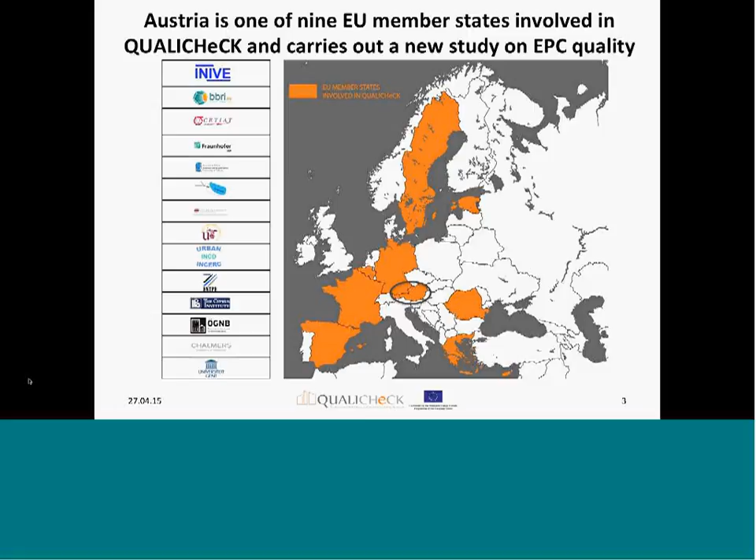Austria is one of the 9 member states involved in QUALICHECK doing a case study on a specific topic, and we work on the region of Salzburg. You see it here, so it is one of the 9 regions in charge of transposing and implementing the EPBD in Austria.

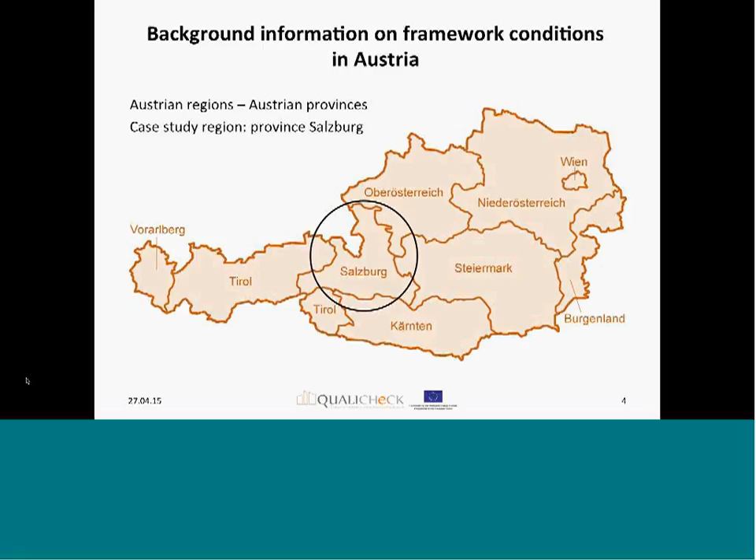How is the EPBD transposition and implementation organized in Austria? We have 9 regions. They are all represented in the OIB, the Austrian Institute of Construction Engineering. This institute develops a guideline. All the provinces are contributing.

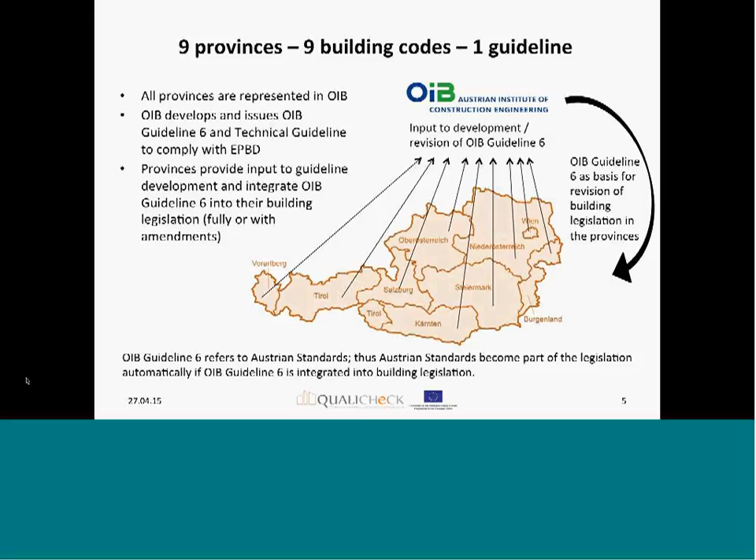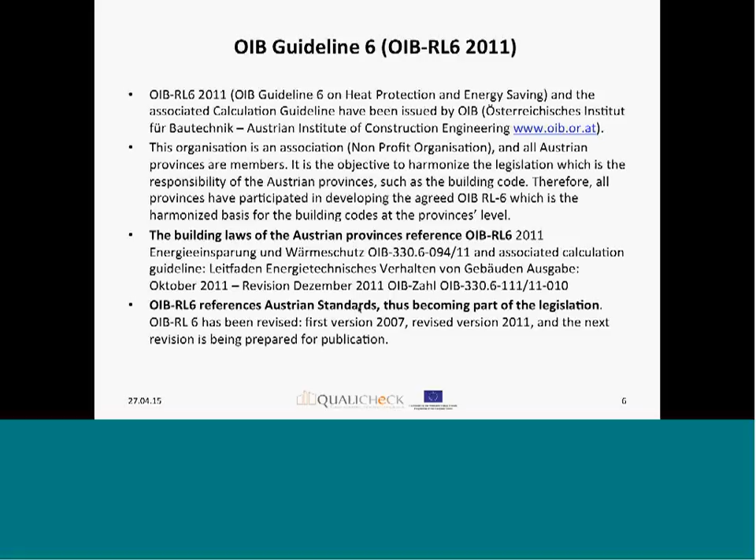This guideline is then the basis for the revision of the building legislation in the provinces. I will not go into detail now, but what is important for our subject in QUALICHECK is that the building laws of the Austrian provinces reference this guideline, and the guideline references Austrian standards, thus becoming part of the legislation. What you see here is a list of relevant standards.

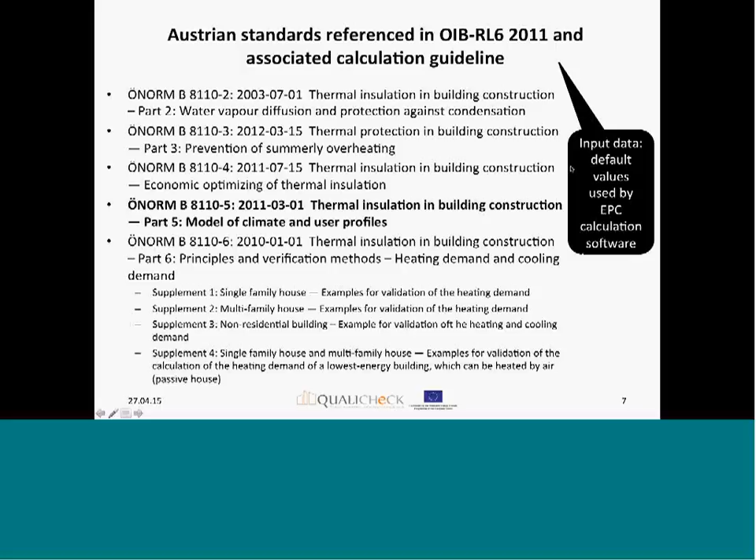I will also not go into detail here. Just what is important for our topic is that these standards contain default values, which we use as input data in EPC calculation software. They also contain information about procedures, so this is why this is important for our work here.

This slide shows the background of the Austrian case study. In fact, we have legal requirements, and this legal requirement is to produce an EPC and show that the energy performance minimum requirement is met. There are several measures how to check compliance.

Like automatic checks in calculation programs and during upload in the EPC database. There is enforcement, like tied to building permits and financial incentives. And then we have a big area of quality assurance methods at different levels.

These quality assurance methods can take place during the design phase and the completion phase. Usually in Austria we have only one type of EPC, the so-called design EPC, which is issued at a very early stage of design and necessary to achieve the building permit.

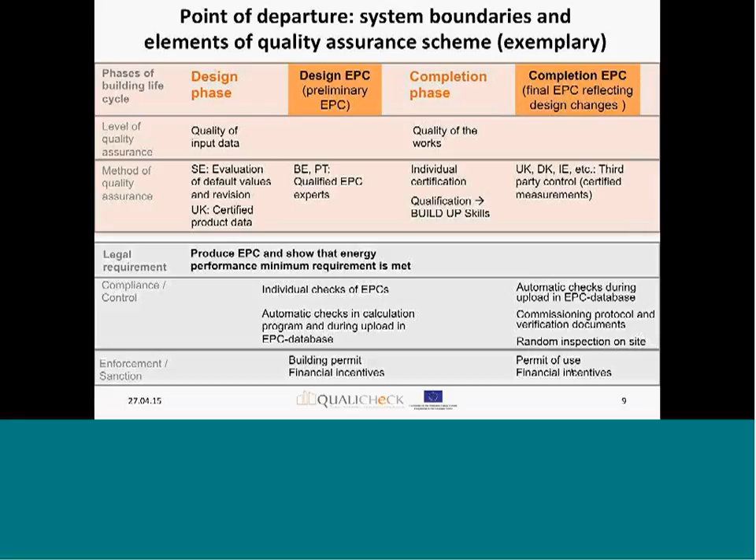In the region of Salzburg, there is also a second type of EPC issued after completion, necessary to achieve a specific type of financial incentive. In our case study, we analyze the quality of the preliminary EPC and the final EPC in the region of Salzburg to see...

...what are reasons at the very early stage during building design and EPC calculation for deviations due to a range of interpretation concerning input data. Do we have a deviation from plan, for instance, because different products have been chosen than actually planned?

And then, of course, there is another important aspect for quality of EPCs and also for the building as such, which means how is it with the quality of the works? Are there mistakes during construction?

So in fact, the expectation is that the final EPC was updated concerning changes in building design, and also reflects the quality of the works.

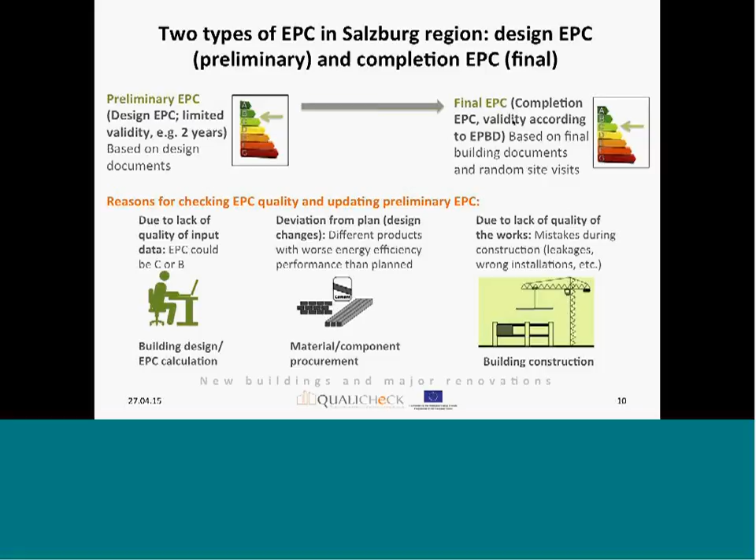So what are the objectives and the scope of the Austrian QUALICHECK study? The objective is to analyze the range of deviation of EPC energy performance indicators depending on the quality of input data and the type of EPC.

So whether we see the design EPC or the final EPC. Then it is the objective to analyze the cause of deviation and develop recommendations how to improve, and especially to develop recommendations for the administration in Salzburg, how this can be linked with compliance and enforcement.

What is our scope? We analyze 26 multi-unit new residential buildings in rural and urban areas. They are well documented, and the surface area is approximately 30,000 square meters.

In our analysis, we focus on 4 scientific areas: transmission characteristics, ventilation and air tightness, sustainable summer comfort technologies, and renewables in multi-energy systems.

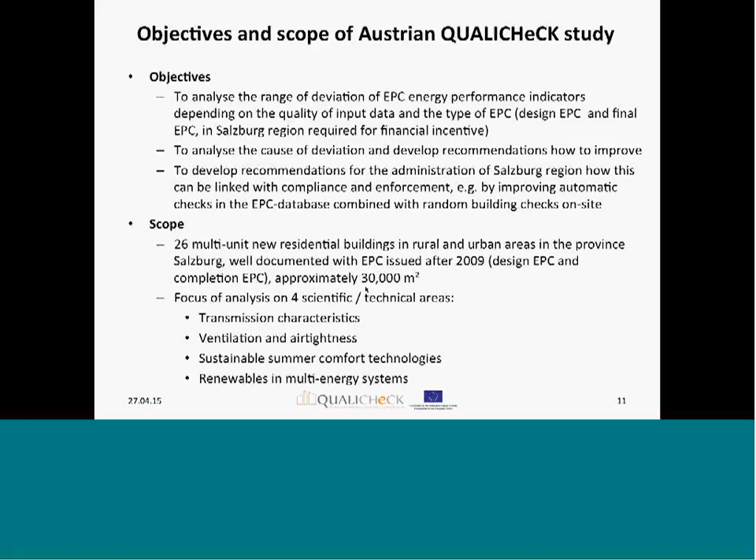How do we proceed? We put a lot of effort in data collection. We collected the design EPC, the completion EPC, but in addition, specific building information like site foreman's plans.

We did a comparison of the design EPC with the original completion EPC, and we did a complete recalculation of the completion EPC based on the collected building information. The analysis is then continued in site visits of selected buildings, inspection and check of crucial parameters.

All this information is used to also do a detailed investigation of specific questions, for instance solar thermal systems and expert interviews. The study ends with developing recommendations for the administration of Salzburg region on how to improve the quality and achieve better compliance.

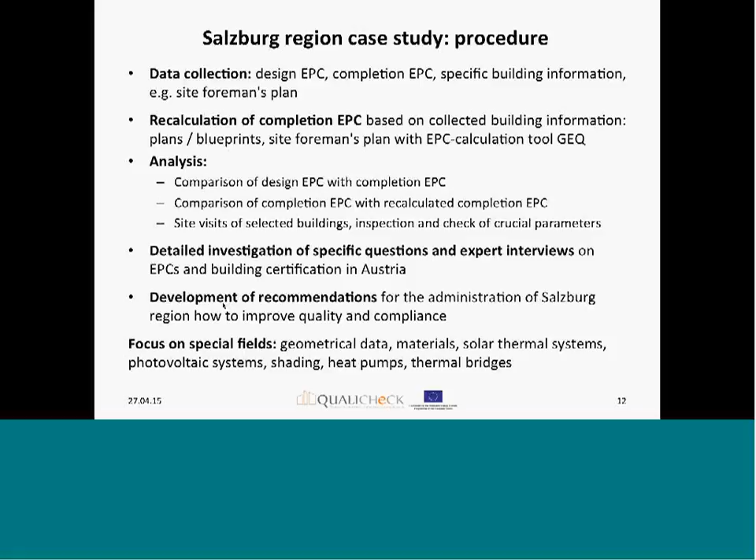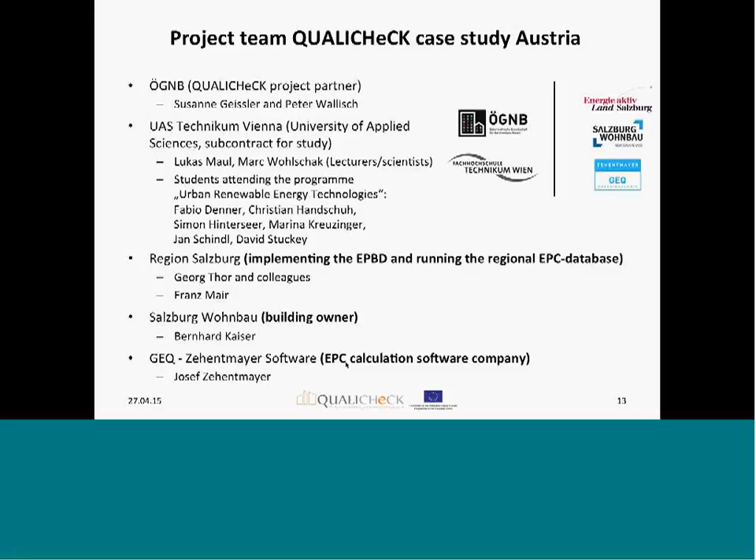In this regard, the composition of the project team is important. We cooperate with the administration, with the region of Salzburg, with the public body in charge of implementing the EPBD and running the regional EPC database. We also cooperate with the building owners and with the EPC calculation software company, because the findings regarding input data and default values will be very important for them.

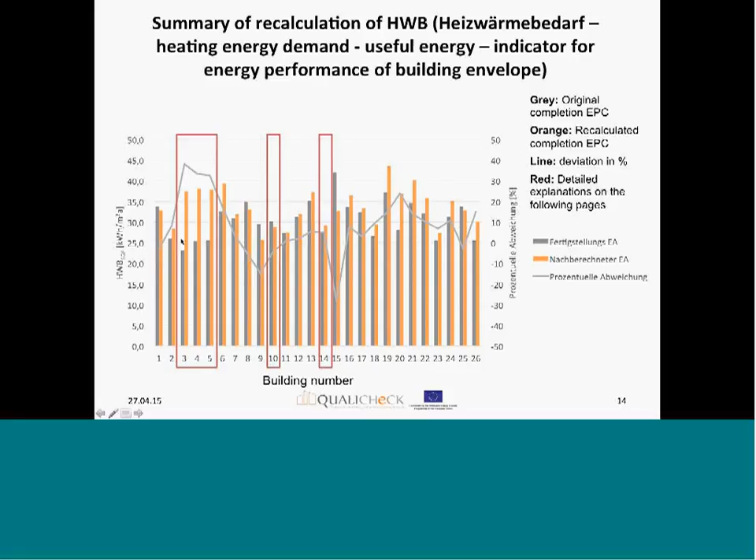The orange column is the recalculated completion EPC. The line here is the deviation, and the red mark shows the buildings I will go into a little bit more detail on.

So we have quite some deviation here, and the most important reasons are that part of the conditioned areas were not taken into account in the original calculation, and that the original calculation only considered one type of wall construction instead of different types, which of course has an impact on the U values.

These are quite typical mistakes. The next building,

it's building 10. There isn't so much difference between the original indicator and the recalculated one, but in this case mistakes balance each other out, meaning there are quite some deviations, but in the end the result doesn't deviate so much. Again, part of the conditioned area was not considered, and an indoor wall was defined as an outdoor wall in the original EPC.

Then we have another example here where the recalculated indicator is just a little bit worse than the original, due to differences in the window area and no zoning between the residential part and the commercial part.

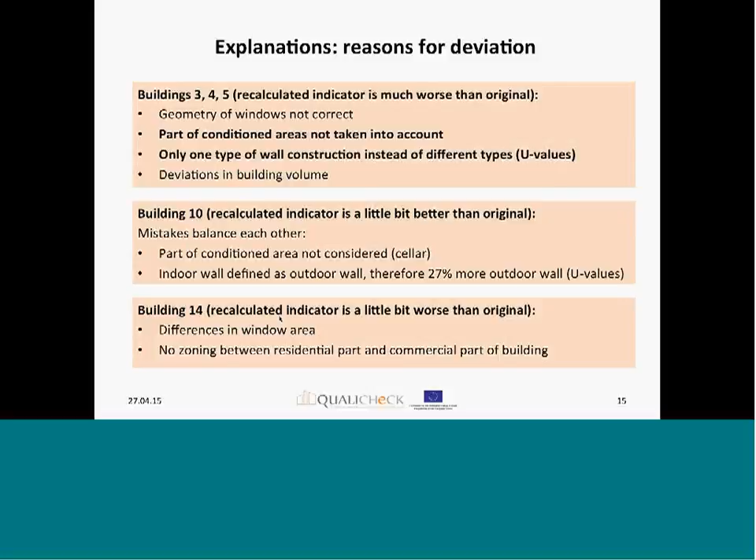So these were some exemplary findings from the recalculation of EPCs. To show you an example of how we go about the detailed analysis of specific subjects, in our case it's thermal bridges, shading, and solar thermal systems.

Regarding thermal bridges, we do different calculations. We calculate with default values according to standard, we calculate with detailed reference values, and we do a simulation to see how the input data impacts the calculation result. In fact, detailed calculations result in better indicators.

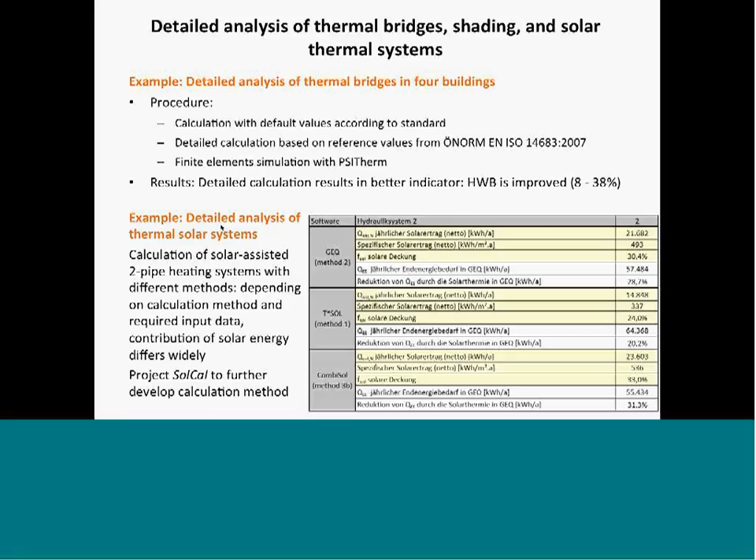Our indicator, heating energy demand, is improved quite substantially. We do a similar analysis regarding thermal solar systems, also calculating with different calculation programs and different types of input data to analyze the difference and the reasons for the difference.

So what are the preliminary results? Just to summarize, we have some findings regarding input data, and in fact mistakes or deviations are due to definitions which need to be improved to be unambiguous, so the range of interpretation has to be reduced. This is one of the problems we have in practice.

We need a revision of default data, and we need a solution for how to deal with heating systems, because it's difficult to deal with them at the moment.

The analysis regarding EPC update shows that there are quite many design changes, and therefore the design EPC must be updated to get a final EPC including design changes. However, it must be ensured that the EPC is actually updated based on the final design documents. Our analysis showed that the original completion EPC often does not differ so much from the design EPC.

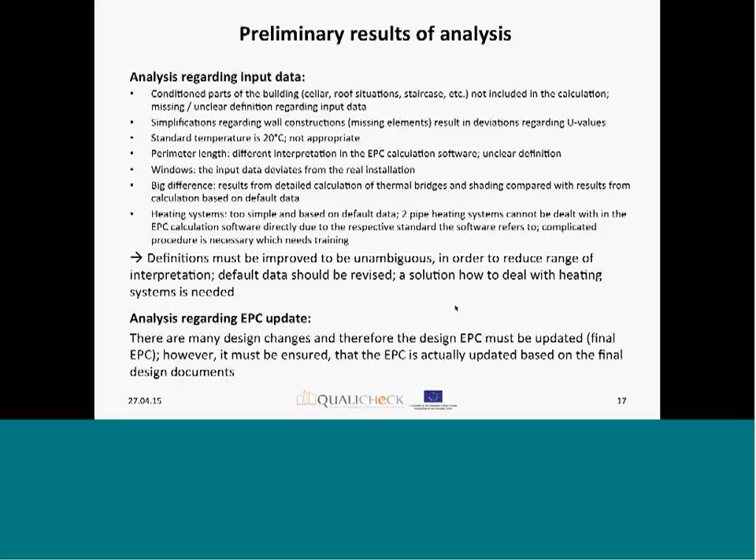How do we proceed? We will select, or have already selected, some crucial buildings, and we check them during site visits, which should be finalized this week. The detailed analysis should be finalized by September, and the recommendations for the administration should also be finalized by September.

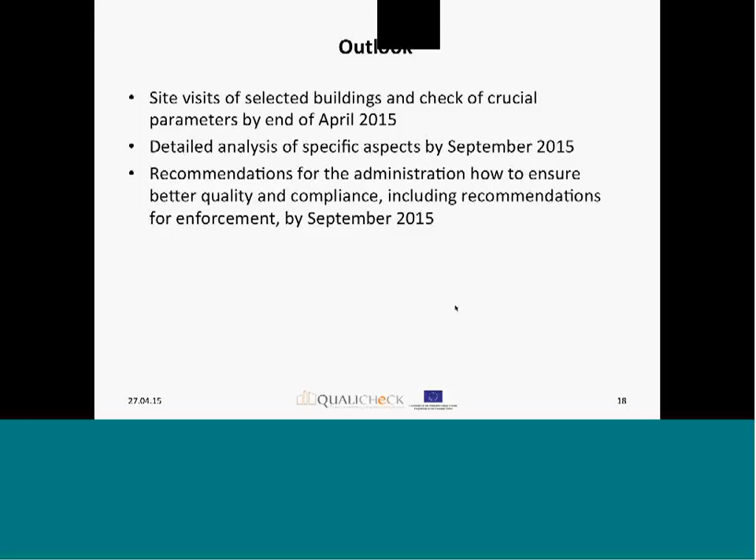So this was a short overview about the Austrian case study within QUALICHECK, and I will now stop sharing my desktop and hand over to the next presenter.